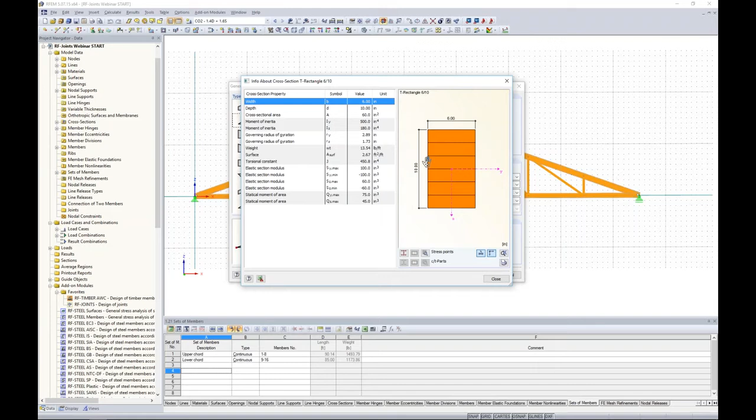For the diagonals and verticals, these are just more of post members, 5 inch by 5 inch, Douglas fir larch, so a softwood here. Again, the member properties can be viewed. Now, the program automatically sets the member type to beam for the upper and lower chords, and you'll notice that the diagonals are set to truss.

For any type of modeling software finite element, we typically have different member types. For our program, beam type is anything that would be a beam or column. Now a truss would be the same thing as a beam, but we've automatically applied the moment end releases to those members. So a truss makes perfect sense for all of our internal members within this truss that we don't want to transfer any moment to our upper and lower chords.

So leaving these settings as is for the member type, we press OK, then we'll get the generation of our timber structure here. Then I did add a pin support on my left-hand side and a simple roller support on my right-hand side. Now, the other thing that we need to take care of is that when I did generate the truss, a fully rigid connection was available at the top of the truss, also on the left and the right.

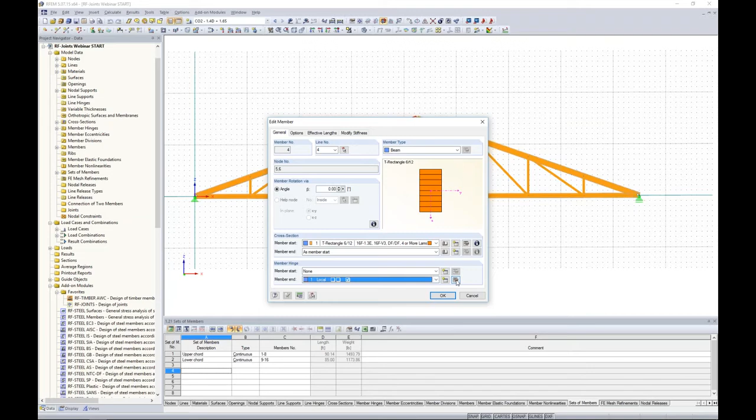So you'll notice that I've applied a simple pinned member end release for the top of my truss, just one of the members. You can do so by editing the member, double-clicking it. You'll notice that we have member hinge at the start and member hinge at the end. I just created a moment release, which you can see here in the two-dimensional direction about the local y-axis. Now I did so at the beginning of the member on my left-hand side and the end of my member on my right-hand side. So modeling is essentially complete for this simple timber truss.

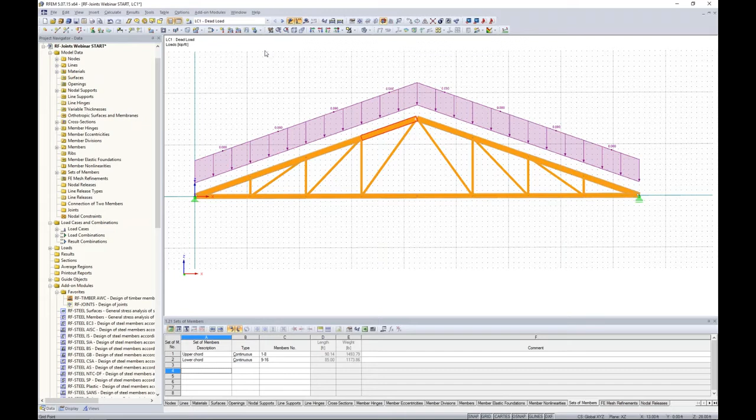I did also apply some loads, and I have two load cases. You'll notice in my drop-down box I have dead load and snow load. So my dead load, if I display it, is just a simple member load, 0.08 kips per foot. The snow load, on the other hand, is 0.12 kips per foot in the projected Z direction. So we're taking into account this member angle and how that load directly applies to these upper chords.

Now I also created a couple of load combinations just manually, and maybe if we enter in the load combinations dialog box we can see this. So we do have the options to automatically create these load combinations like I mentioned per ASCE 7 for example. But for the simplicity of today's example, I created two load combinations.

The first could be considered an ASD load combination where my load factors are 1.0 for dead load and snow load. My second load combination is maybe an LRFD load combination where I have applied the load factors of 1.4 and 1.6. You can see in this drop-down box we have quick access to them, or we can overwrite them with whatever load factor we would like.

So now you have the ability to toggle between the load cases and load combinations, and we can run our first analysis. I can go to calculate all, and we'll see within a split second the model will be solved. So we are still in RFEM. We haven't touched any of the add-on modules yet. So once we run this analysis, in our project navigator over here, we have the results tab available.

And we can, for example, view everything graphically such as global deformations. We can change the display factors here. What may be a little bit more interesting is to take a look at our member internal forces. Here you can see we have our axial forces. We have some pretty high tension forces on the bottom. We have high compression forces at the top, denoted by the negative magnitude sign here.

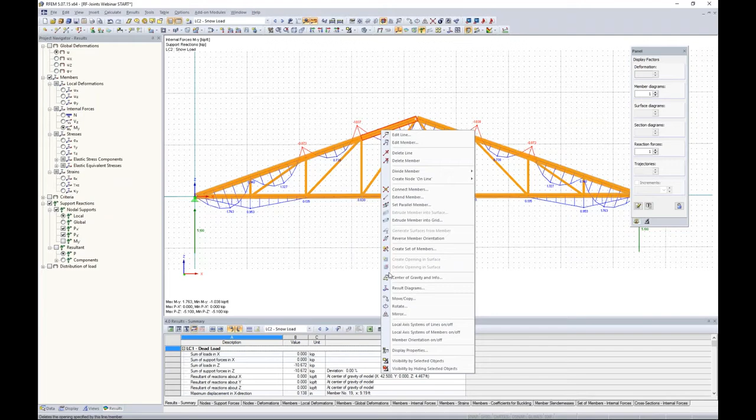Now, this is great graphically, but sometimes we want to see a little bit more information as it relates to the member. So we can always right-click on a specific member and choose Results Diagram.

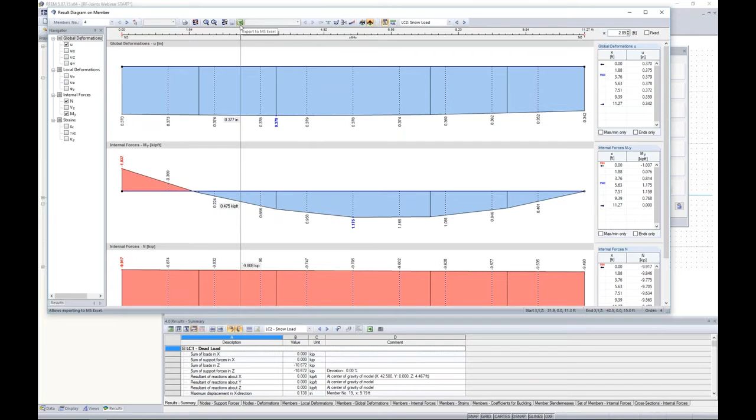Now you'll see the entire member here. We can turn on more graphs such as internal forces, deflections, and get a more realistic view of what's going on along the length of the member. You can print this off directly to our printout report. You can export directly to Excel for further sorting. So a lot of powerful capabilities in just viewing our analysis only.

So now that we have run a full analysis, that's great, but typically as design engineers, we want to move on to code checks. So this is where we are going to make the clear distinction that we're going to utilize an add-on module. In the data navigator over here, you will see the long list of add-on modules. We do work in the add-on module system because we really want to cater the software to your needs. Not everybody is going to be in the Chinese steel design, for example, so why should you pay for it? So we, again, are trying to cater towards your specific design needs.

We also have them organized a little bit better with this add-on modules drop down at the top here according to the different materials and applications, dynamic analysis, things like that. So for today, we will launch the RF-TIMBER AWC. Now, to begin with, you'll notice we have both ASD and LRFD, so that's nice. Some other software programs for timber design only give you ASD, for example, so you have complete control over which design method you would like to run. Today, we will choose the LRFD.

Now, the ultimate limit state design, you'll notice that my load combinations and cases were brought in from RFEM, so I don't need to redefine any of that. So ultimate limit state, we'll choose our LRFD load combination, and serviceability, we will choose our ASD load combination.

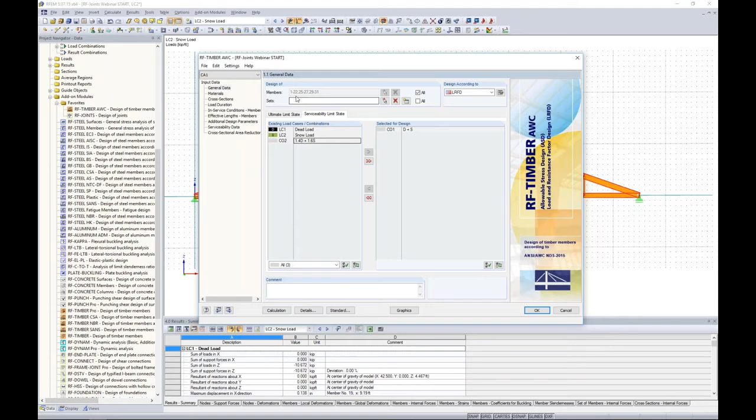Now, the next thing to go ahead and define are which members or sets of members would we like to design. So let me quickly explain that when we go back to this add-on module, if I zoom in here, the program automatically created a set of members with the truss generation for my bottom chord, and I also have a set of members for my upper chord. What I wanted to mention is if you do zoom in, you can see a faint dotted line around it. I know that's hard for you guys to see, but if you were in the software, you'd be able to hover over that and see it's a set of members.

A set of members will essentially be designed like a continuous beam. You know, we don't want to optimize one of these individual members different from its adjacent members. We want to get a code check for this entire bottom chord. So that's where the sets of members comes into play.

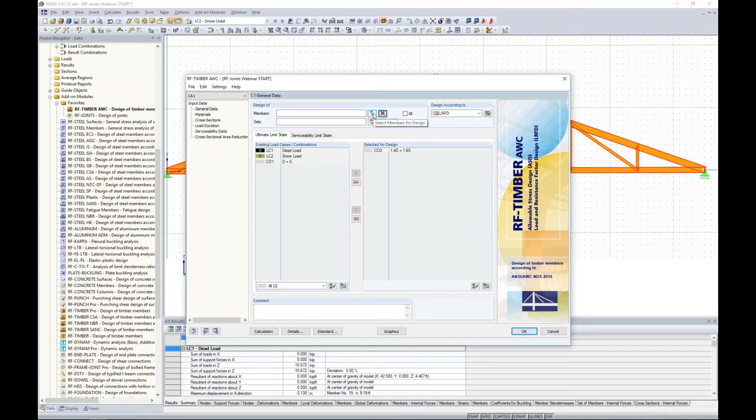Now the default is to select all members. I'm going to clear this, and for my member design, I'll scroll in here and I can just use my selection box, similar to what you would find in AutoCAD, for example, to select all of my internal diagonals and verticals for my member design. And for my sets of members, I simply choose graphically the upper chord and the lower chord, and we click OK. So now we have the distinction between members and sets of members for what we'll be doing for design purposes. Now all I need to do is to simply move down the list.

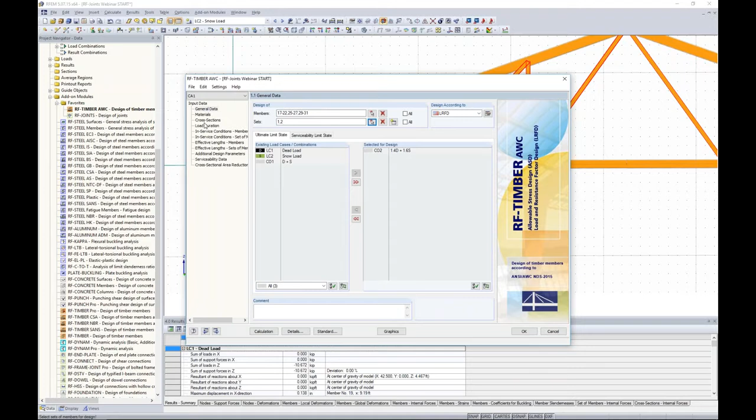Next we will go to materials. Again, everything is brought in from RFEM, so I don't have to redefine my materials, my geometry, my cross sections. All that we're doing in this add-on module is giving some further design information related directly to the NDS code.

Now you'll notice that we have two bright red materials here, and that's just because when I open up a new model, concrete and steel are defaults within the program. I can delete these back in RFEM if I wanted to, but all the program is telling me is that these are not applicable in the timber add-on module. That makes sense. But our two materials that we did define to our members back in RFEM are applicable. I can click them and view all of the material properties that will go into the design of this member.

Again, cross-sections, same concept. The member cross-sections are brought in from RFEM. I can view some of the cross-sectional properties here again if I'm interested in them. And we can move on to load duration.

Now, this is load duration factors. We assign dead load and snow load to the applicable loads that I applied in RFEM. The program is smart enough to know what load duration factors to apply to this. Now, we can always use our drop-down box to adjust these, but even more so, there is the standards button down at the bottom of the dialog box.

So the standards button will show you every single factor that is going into the design process within this add-on module. So for example, the load duration factors. What is nice is that you can adjust these if for some reason you don't fall between 10 years and 2 months, but somewhere in between, you can adjust them. That's completely up to you.

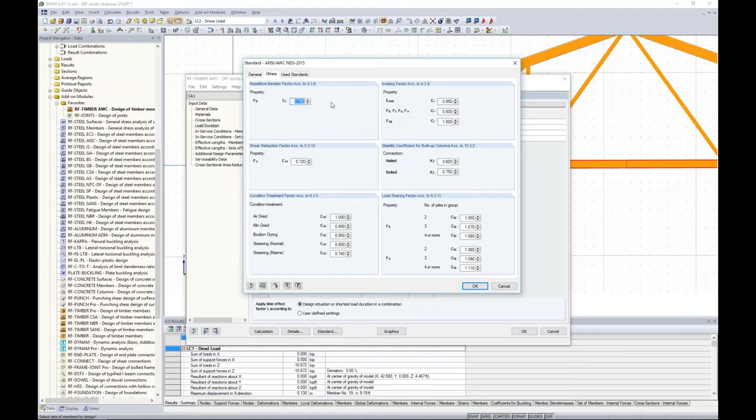Then you'll notice some of the other factors such as temperature factor, wet service factor. If we go to the others tab, repetitive member, shear reduction factors. Again, this is just all the information from the code. Under the used standards, we just list for you to know which standards are being utilized for the design, which you'll see at the end, we give you references to these standards as well.

So moving on down the list to in-service conditions. Again, this just comes from our standards button down here, moisture service conditions. Are the members dry or are they wet? Our temperature ranges, we can change these if we would like. Now you'll notice that we have 2 separate tables for members versus sets of members. This is just so we don't group everything together. I think it's laid out a little bit nicer when we separate members versus sets of members, and then we can control those factors individually.

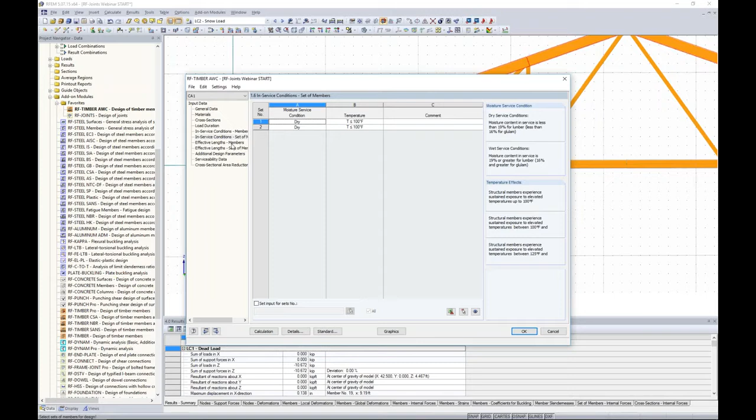Effective lengths for members. So this is stability checks. You'll notice that we have buckling about the weak axis, buckling about the strong axis, and lateral torsional buckling. So I'm going to assume for all of my internal diagonals and verticals here that buckling about the strong and weak axis as well as lateral torsional buckling is a concern. So I'm just going to leave everything as is here, and I'm going to let the program determine if this is okay based on my design.

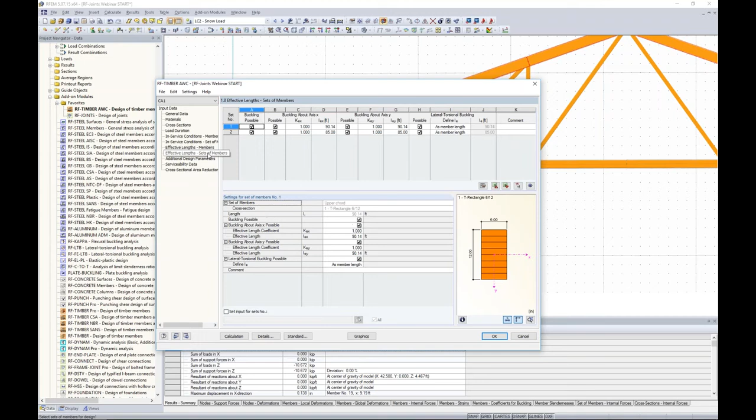Now the effective lengths here default to the full member length, but you can easily control these lengths by typing it in or graphically using the measuring tool here, so you have complete control over this. Now again, our sets of members is on a separate table. And for my upper and lower chord, I'm going to assume that I have complete lateral bracing along the length of the member. So therefore, weak axis buckling about the local z-axis, which I have my axes shown down here, is not a concern to me.

And it would be the same thing for my lateral torsional buckling. So this is not a concern based on my connections or my lateral bracings. All I have to do is just to simply uncheck the possible. Buckling about the y-axis or the strong axis, I am still concerned with this, but right now it is set to the full member length, the full set of member length. So it's pretty large, 90 feet and 85 feet.

Maybe for uplift wind purposes, I have much smaller unbraced lengths here. For example, the upper might be 3 feet and then the lower might be 3.5 feet. So as a design engineer, you always want to pay careful attention to your unbraced lengths because this significantly affects our stability design.

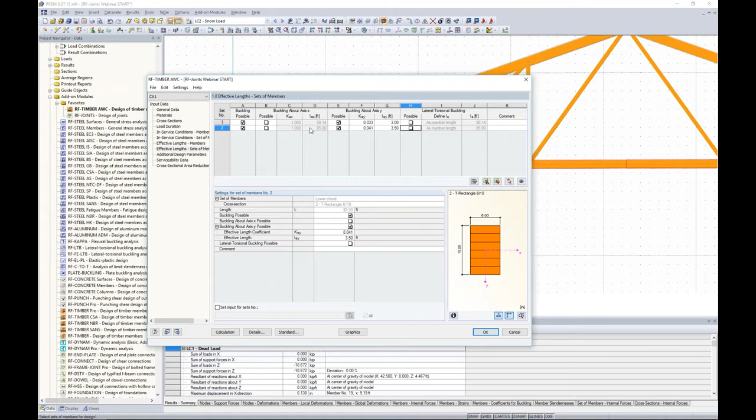Okay, so moving on to additional design parameters here. This is just shear reduction factors, edge bonded. This refers to our glulam members for our upper and lower chord members. We have the code references here. Again, the standards button will tell you what those factors are. If we scroll down a little bit further, here's our incising factors and repetitive factors for our post or our brace members within the truss.

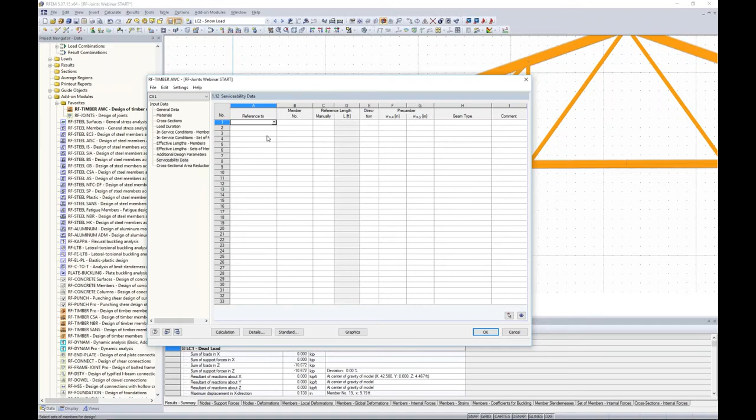And we can move on down to the serviceability data. Here is just deflection checks. We can check every single member if we'd like to in our model, or maybe we're only concerned with checking a couple of members. So for this example, I will graphically choose perhaps one of my diagonals here that I want to check my deflections.

I click OK. The manual reference length is set to the full length of the member. That's fine. Do I have a pre-camber? If so, I could put this in here. And lastly, I need to specify if this is a beam or cantilever.

Now I can do the same thing with a set of members. So maybe I'm interested in my bottom chord deflection. Well, all I need to do is to graphically select my bottom chord here. The full reference length is set at 85 feet. And again, we just use the beam type beam.

Now the question is, what deflection ratios am I comparing this to? Where can I control that? Well, under the Details tab under Serviceability, here's my limiting deflection ratio. You can see the default is set at L/360. Now for cantilevers, it will always use 1/2 of this ratio that you set in here.

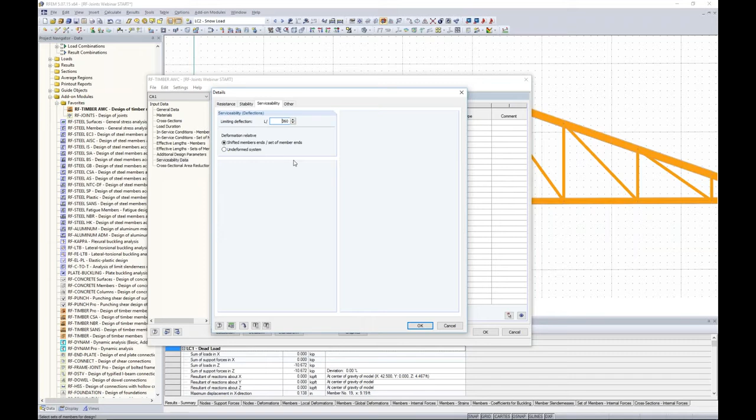Then you need to specify whether the deformation is relative to the shifted member ends or the undeformed system. This may be better known as relative versus absolute deformation. So this is where we can control this limiting deflection ratio and change that if we'd like to.

And lastly, we can move on to the cross-sectional area reduction. This is if we have a notch within our member. Maybe the member connection at the ends, or maybe the member is sitting on top of a wall or another member, and we have to take this cross-sectional notch out of the member. We can easily account for this by just selecting the member graphically again, and then giving where the notch location is, whether that's the start, the end, or within the inner span here.

Then we just give the notch the geometry, and the program will automatically account for that cross-sectional area reduction. So it's smart enough to only compare those internal forces at this notch location for design purposes, meaning we don't have to reduce the entire cross-section of our member and get an over-conservative design. So just a nice little additional feature if you do have this scenario. For our case, we won't do that today.

Now, before running the calculation, I want to quickly run through the rest of the details tabs. What is exactly going on behind the scenes here with some of these other options? So the first one under resistance is consideration of connections, the reduction of limit tension stresses. So if I check this, what this means is that occasionally we have the weakening of a cross-section at a connection. So what I can do is check this checkbox, and all I need to do is to select a node, and here I give the connection length. Maybe that's 6 inches, maybe that's 1 foot, and I can actually reduce the stress ratio inside that connection.

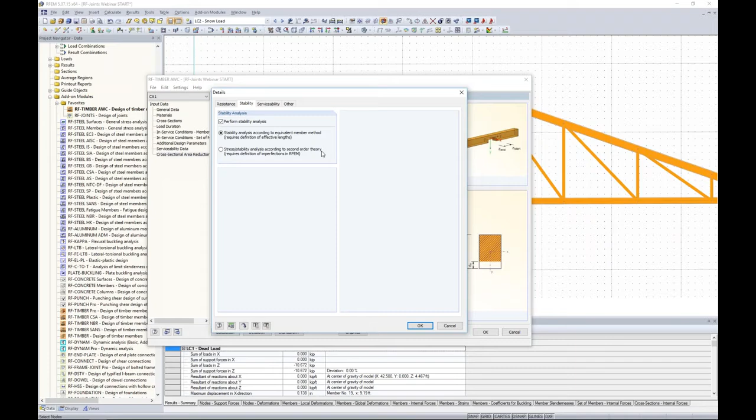So with that said, back in RFEM, if I open up my load combinations, you'll notice that under calculation parameters, it is always default in the program to run a second order analysis for our load combinations. This will take into account P big delta and P little delta. So perhaps you have an existing structure, or you're just really close on your design checks and you don't want to increase your member sizes. Technically, you can go back into RFEM, change this to a geometrically linear analysis, and then you can take into account these second order effects within the add-on module only, so the design part of it.

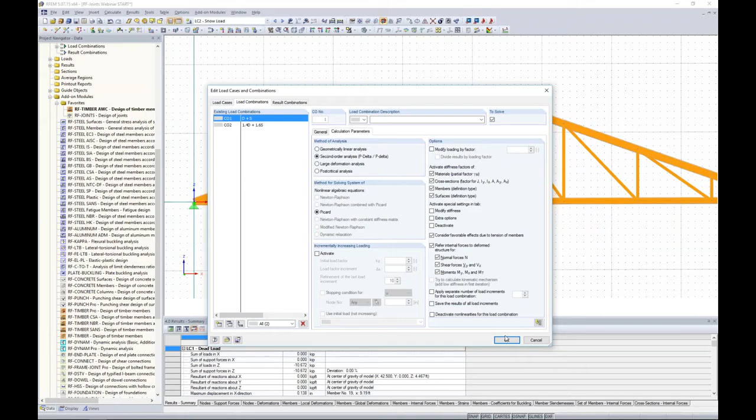Now, it is typical for most engineers just to leave on P-delta analysis in RFEM. Therefore, your internal forces are a little bit higher, but it's just a more conservative route to take. Now, the other option within here is stress stability analysis according to second order theory. It requires definition of imperfections in RFEM.

If I were to check this, what I'm doing is I'm telling the program under the effective lengths that the buckling for strong and weak axis, I'll take that into account with the analysis. Maybe that's with stiffness reductions or with those notional loads, imperfections, things like that. With lateral torsional buckling, there is no way to take that into account with the analysis side, so I'd like to still do a check with that within the design side. Regardless, today we will stick with the default of checking, again, our strong and weak axis buckling.

Serviceability, we've already been through, and on the other tab, cross-section optimization. So design ratios are maybe more around 0.8, possibly 0.9. It's typically not 1.0. So for optimization for your members, which I'll show you in just a second, you can change this to 0.8, for example, for design purposes.

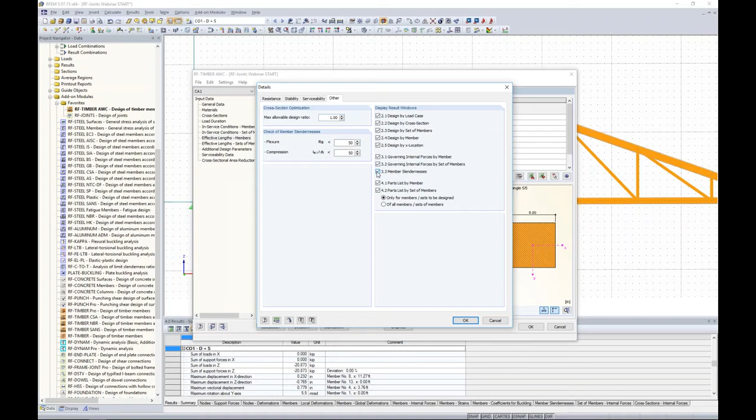Check of member slenderness. If member slenderness is a concern, here are the ratios that we have set according to the code for flexure members, compression members. You will need to activate 3.3 member slenderness right here for our result windows if you are wanting to check for member slenderness. So that's pretty much the concept for all of the input data, and now we're ready to run our first calculation. You can see that solves within a quick second. All it's doing is bringing the internal forces into this add-on module from RFEM, and we apply the NDS code for our design.

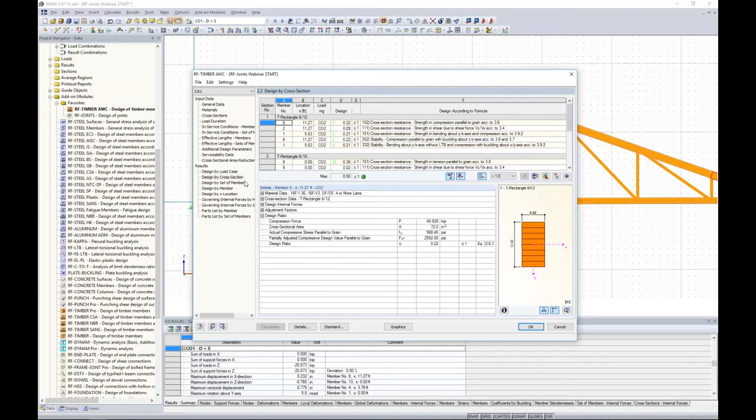Now we have our results tables available, and we can view the design by load case. We can view design by cross-section. We have 3 different cross-sections here. Maybe we want to view design by the sets of members or by each individual member. Now, what's also great is that as I'm clicking through these tables, you'll notice that it is synced to the graphics view in RFEM. Even the X location of my controlling internal forces line up with my tables here.

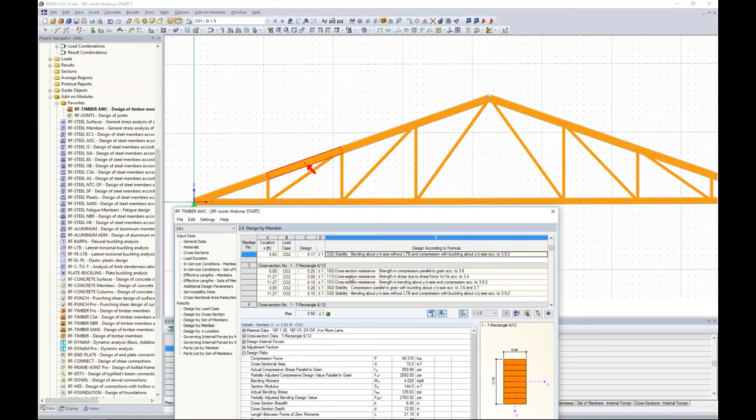And something else that I really pride ourselves on, because I know this isn't available in a lot of other software, is that we give you the code check for everything within the NDS. So we're not just giving you the controlling code check for each member, but you can actually scroll through and view the different checks individually. Even more so, we give you all of the variables that go into that code check, as well as the equation references. So if you have the NDS code right in front of you, here's the equation for your C sub P factor. You can quickly flip to it and understand where those numbers are coming from. So again, a very powerful feature.

Now you can always export directly to Excel to do some further sorting, and as you can see, we have this nice big green smiley face because our design check is only at 0.5. So looks like we're doing quite well with our design. We can also view some of the governing internal forces by member if you are interested in that.

And lastly, we have a parts list by member or a material takeoff. So as far as optimization, just to quickly touch on that, if we go back to our cross sections table here, you'll notice that the max design ratio for each cross-section is given. I think we can see that our top chord is pretty low, 0.22. So maybe this isn't an ideal cross-section to have, and rather we'd like to optimize to something more like 0.8.

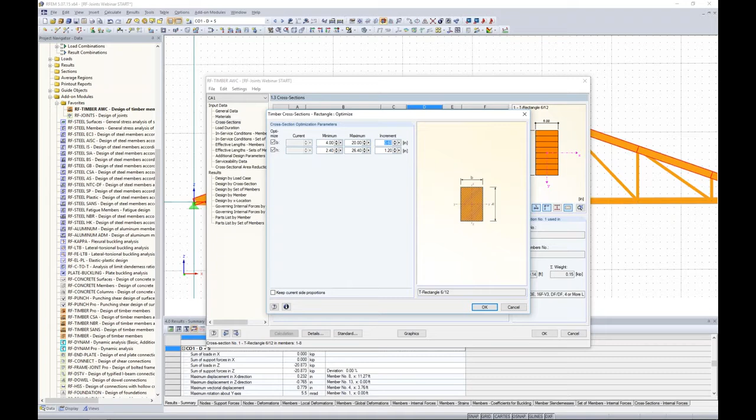Well, again, we control that 0.8 under our details setting, and here is where we can choose the option to optimize. When I click yes, then all I need to do is give the program some dimension ranges for both my depth and my height, like maybe 4 inches to 20 inches with an increment of 0.5 inches. So then we can just rerun the calculation, the program will optimize, and we can continue on with using these new section sizes. For connection purposes, I'm not going to do this, so we'll just stick with the design that we're given.

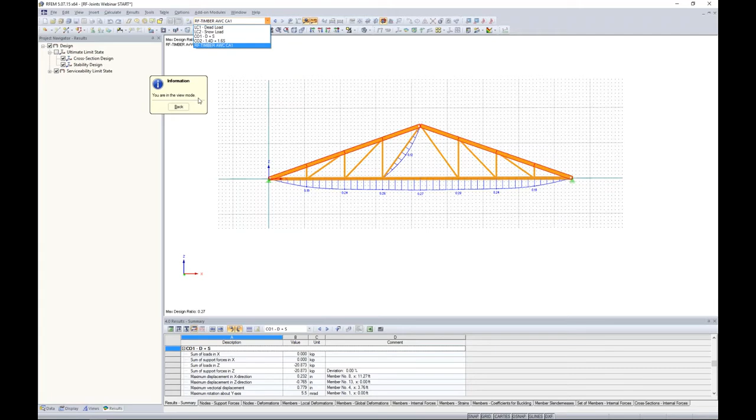Lastly, we can view everything graphically. We're back in RFEM, but we're still technically in the add-on module, which you can see from the drop-down box and this little dialog box here. We're still in RF-TIMBER AWC. So I can view my ultimate limit state designs, which you can see graphically here, and I can turn on my panel. Well below 1.0, we can print these off.

Serviceability we can take a look at. Remember, we only check serviceability deflections for our set of members down at the bottom and one single member here. So graphically, we can view everything rather than just the tables. So that basically sums up the member design. And the next thing that we want to move on to is connection design.

So I can go back to my data tab, and I have my other add-on module here, RF-JOINTS, and I will launch that. So again, just another simple dialog box, which is the add-on module, taking in all the internal forces. We just need to further specify some information. You'll notice that we do have steel and timber. Unfortunately, at the moment, steel is only per Eurocode design, but at some point in the future, we do plan to add AISC as well as CSA steel connections.

But what is exciting is that we did add the NDS 2015 for our timber connections. You can see we have both ASD and LRFD available. Maybe to just continue on from our member design, we will stick with LRFD design. We have steel to timber connections. Now the joint categories, we either have general dowels we can choose from, or you can also see that we have bolts. For today, we will be going with general dowels.

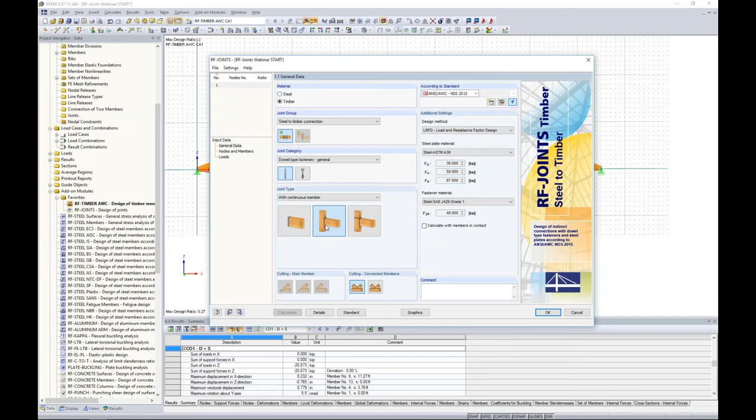Now, 3 different joint types. We have the first joint type, which is main member only. Maybe you have the cantilever of a beam from a wall, for example. Well, that would be applicable for this type of connection. The second connection type would be with a continuous member and a second member framing in. Well, that might be something more like this connection here where we have our continuous upper chord and we have a vertical framing into that continuous member.

And lastly, we have without continuous member. So at this particular connection joint, we don't have any continuous members that we're wanting to define. So this is what we'll be continuing on with today. As far as the cutting of the main member and connected members, I'm going to pause on this and we'll get back to this because it'll make more sense once we're visually looking at our connection.

The checkbox calculate with members in contact. If we were to turn this on, this essentially just tells us that we're considering 2 members are in contact. And if we have extremely high pressures from one member down onto the other member, the program will actually flag us and tell us, well, this is something that you may want to look into further.

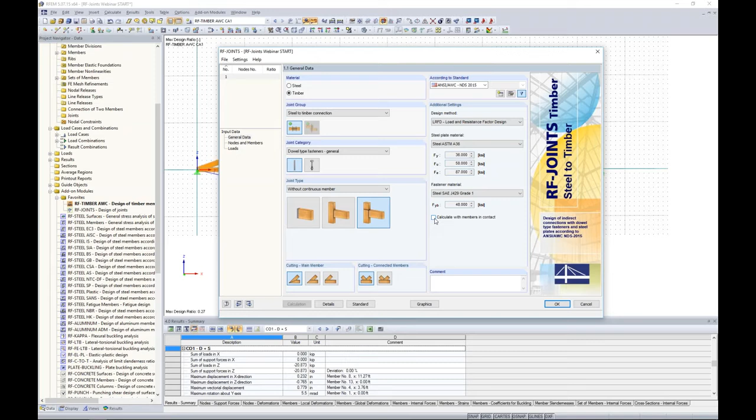So we don't give you design for these members in contact, but it's just an additional check to notify you if we do have some extremely high pressures from one member to another. So again, we just simply work down our list here. We'll move on to nodes and members.

Now in our little graphics view, you will see our truss. This is brought in from RFEM, and nothing's highlighted right now. Everything's grayed out because we haven't selected any nodes in particular. Now this is import from the structural model, or we can set manually here.

Now if we choose set manually, what this allows us to do is to really define any type of connection that we want, including the materials, the cross sections. We can define different angles, so we don't have to use what we had modeled here in RFEM. For today, it definitely makes more sense to import in what we've already modeled in RFEM, so we can do a further connection design here.

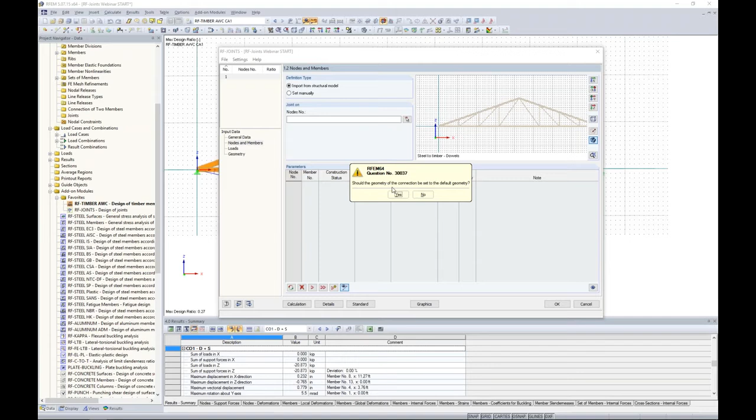The first thing I want to do is to choose my nodes that I'd like to consider for my first connection. Well, I'm going to choose node number 1 on my left and node number 2 on my right. These will be identical connection designs, so we'll use those. Should the geometry of the connections be set to the default geometry? Yes, I want to bring in what RFEM already has modeled.

Now you can see I can zoom in here and my members are highlighted at that particular connection. So at node number 1, the program automatically assigned the connected member to member number 1. And if I use my drop-down, I have connected member, main member, inactive. Now member number 9 at the bottom is set to the main member. My materials and cross-sections were automatically brought in from RFEM. Even my angles were automatically determined, so I don't have to worry about redefining that information.

Quickly jumping to geometry. Now, our picture of our connection will be populated here, and I think we're all in agreement that this is not the ideal connection. Nobody would cut these two members right down the middle and create a connection by any means looking like this. So how do we change this? Well, back on the General Data tab, this is where the cutting of the main member and connected members are affected. So I'm going to change this to the second option, which you can see here graphically.

Now jumping back to my geometry tab, well, this is looking a little bit better. But ideally, all of these internal forces from our upper chord are going to be bearing down on our bottom chord. Timber is not very strong when we're considering these internal forces bearing down here. So I want to flip-flop these, so to speak.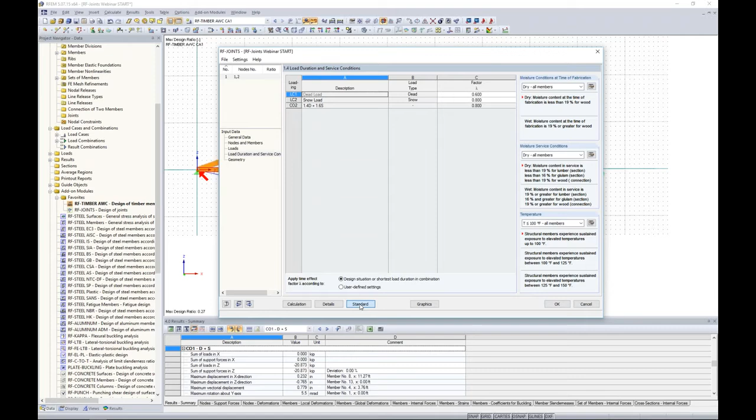Load duration and service conditions, this should look pretty familiar to what we just saw in our AWC module, our member design module. Things like load duration factors, moisture conditions, moisture service conditions, temperature. Again, if we pop open this standard, well, here is where we can see all of the different factors that are applied for the connection design. We can scroll through these. Everything's just coming directly from the NDS code.

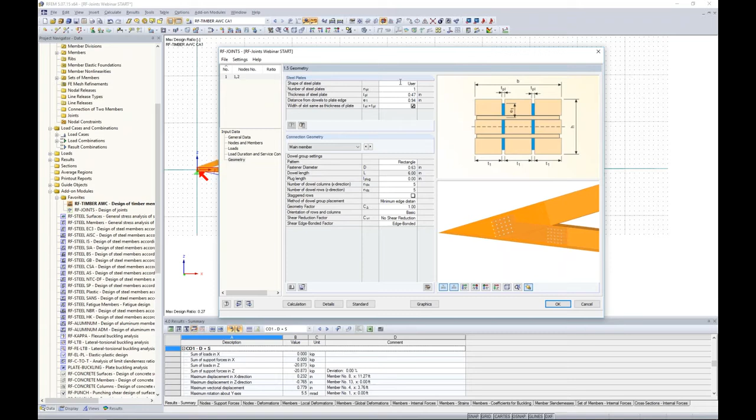So lastly, moving on to geometry. So this is probably the most important because here is where we are going to define our dowel layout and our steel plate layout. It's pretty self-explanatory. All I need to do, again, is work from top to bottom, filling out each variable here. Now, the shape of the steel plate, the first option is user-defined, which you can see that this is basic, just rectangular sections at my upper chord and my lower chord.

The second option is convex hull. The program will do the best attempt it can to simply connect these two rectangles with a straight line. So maybe this is something a little bit more similar to what we'd see actually fabricated. So that's an option if you'd like. And the third option is rectangle. You can see this is not ideal for our connection today, but this could be ideal for another scenario. We'll just stick with this user-defined connection for now.

Now, the number of steel plates can vary anywhere between 1 and 5 steel plates. For the first run, we'll stick with 1 steel plate. We do need to give the thickness of the plate. We'll set that to 0.5 inches. Now the distance from the dowels to the plate edge, E1, we do our best to give you all of these variables graphically as well, so you can understand exactly what information you're entering in here. So for that edge distance, we will set that at 1.2.

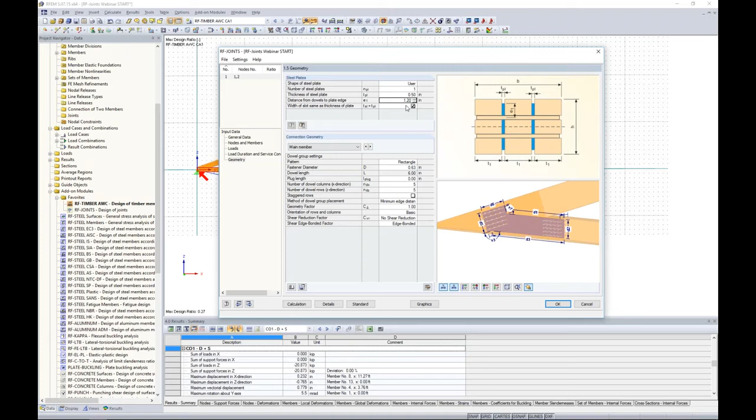Now, is the width of the slot the same as the thickness of the plate? Well, if this was not, then I could specify the slot thickness different from the thickness of the plate if I would like to. Moving on to the connection geometry, you can see that we have the main member here, or we have connected members. So we first want to start with our main member. The pattern will always be rectangular.

The fastener diameter, which we can change our viewport here and zoom in to see exactly what we're setting in terms of our dowel layout, we will set to 0.5 inches. Now the dowel length is automatically calculated simply based on the thickness of my glulam member. So this is set at 6 inches for the thickness of the member.

Now perhaps I would like to not see the dowel holes, for example, and I want to put a plug on either side of these. Well, here's where you can set that plug length of maybe 0.5 inches. And you'll notice that the dowel length automatically takes that into consideration and reduces to 5 inches. For today, we will leave the plug length as 0.

Now, the number of dowel columns, we can set this to 8. The number of dowel rows, we will set this to 4. The little picture automatically updates here. Staggered rows. This is just a more economical design. We still have 8 columns and 4 rows, but because our bolts are staggered, we can get away with a few less dowels or bolts.

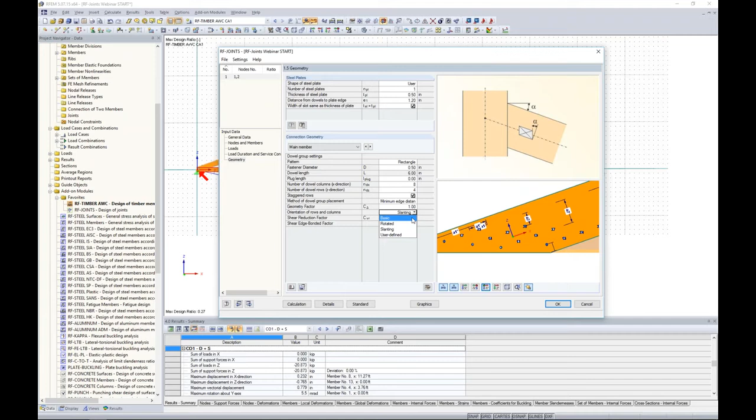The orientation of rows and columns, the default is set to basic. You can change this to rotated, where the program will automatically rotate that 90 degrees. Maybe we want it slanting, which is an interesting configuration where it will fit them all at the bottom of the member here. Or the fourth option is user defined, where we can define an angle and a rotation here. We'll just stick with the basic layout for this example.

Shear reduction factors, shear edge bonded factors, again relate to our glulam members. So we have this set for our main member. Now we'd like to use our drop-down box to move on to the connected member. So for the connected member, we need to make some changes here again. The fastener diameter, we'll set this at 0.5 inches. The number of dowel columns, we will set this to 10. And the number of dowel rows, we'll set this to 2. I would like to utilize staggered rows if possible, and we'll leave this at the minimum edge distance.

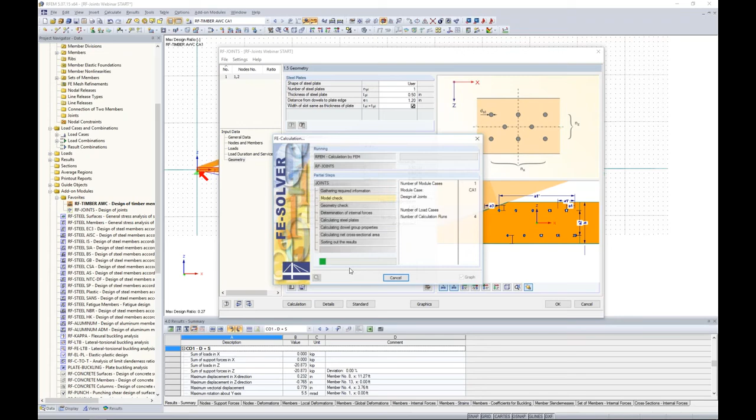So now we're ready to essentially run the analysis for our first connection. All we need to do is run calculation. Again, the program quickly cycles through that, and we come up with our connection design. So what's initially shown here is our main member and our connected member. I think what's probably standing out to us is this bright red number of 4.61. That's certainly not okay. If we're looking at a few of these other checks, again, complete code transparency, so to speak, for our connection. We give you the code check for everything.

If we're cycling down through these, and we will get to dowel group, load carrying capacity of a single dowel. Well, we're extremely overstressed for this. Maybe I want to scroll down through, see where some of my numbers are coming from. All of the factors are listed. Here are all of my equations directly from the NDS code. And lastly, my extremely high ratio of 4.61.

Scrolling down to my connected member, I obviously have a huge problem here as well. My load carrying capacity of a single dowel is exceeded. So before checking out the rest of the results, let's go back to our geometry and make some changes here. Maybe the first change I'd like to make is I'm going to add an extra steel plate. It's asking me, do I want to delete my results?

Yes, this is fine. Now I can kind of rotate this view around, and you can see that these steel plates are shown here graphically quite nice. It's a nice rendered view where we can actually see what's going on. Now, there are a few other settings that came up with adding 2 steel plates. For example, we can set these as side plates if we wanted. So rather than be embedded within the glulam members, you can see now they are side plates.

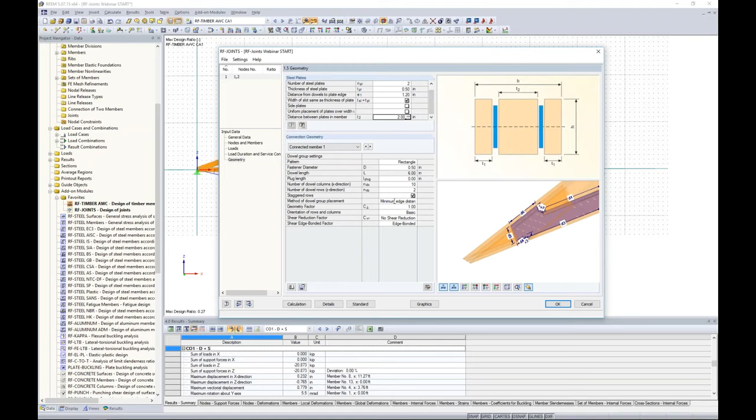Looking at our connected member number 1, well, I'm going to leave most of this as is except for the method of dowel group placement. Sorry, I want to switch this over to the main member first of all. So we'll scroll in here to our main member. Now, instead of the minimum edge distance, I'm going to choose a user-defined setting here. So the distance between dowel columns, which you can see everything is shown graphically here, again, for what numbers I'm entering for my variables. Perhaps the distance between the dowel columns, we'll set this at 5 inches.

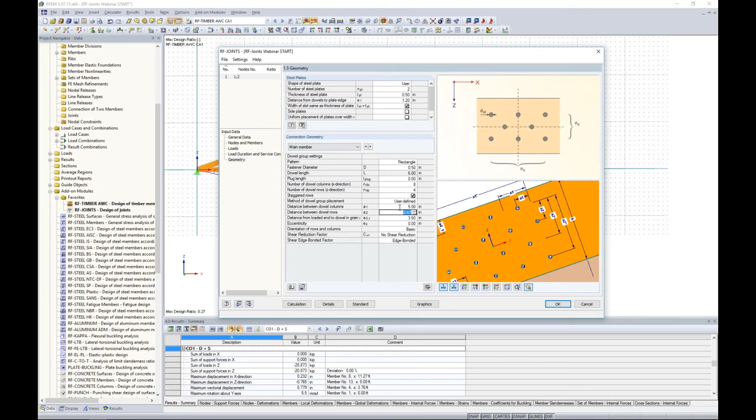The distance between the rows, we can change this to 2.5 inches. And the distance from the loaded end to the dowel, A3, which you can see here, we will set this to 6 inches. Eccentricity, if you want to move this connection up or down, you can do so as well with this eccentricity setting. Now, everything else we'll leave the same for this main member.

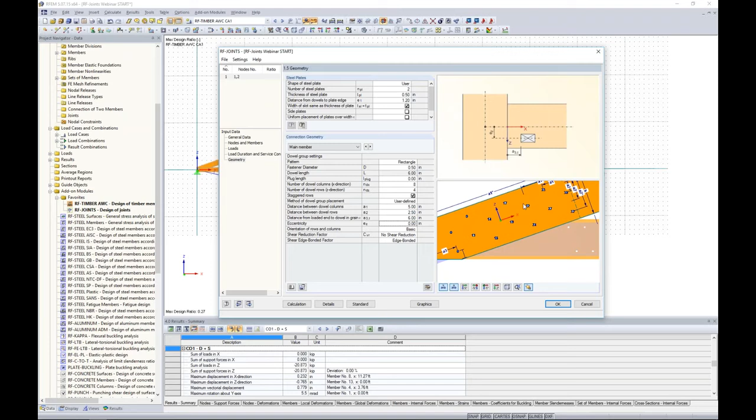Connected member number 1, remember we're extremely overstressed here. There were pretty high tension forces on this lower chord. So maybe I want to space out these dowels a little bit more to get a little bit more capacity down here at the bottom. Now we did add a second steel plate, so that will help us as well. So instead of the minimum edge distance, I'm going to use these user-defined settings as well.

So my distance A1 between my dowel columns, I'll set this now to 5.0. And the distance between rows will be 2.5, and the distance to the edge, A3, will now be 6.0 as well. No eccentricities. So now that I've made these slight adjustments, we can quickly rerun the calculation with this new geometry to take a look at our results. It looks like we're still slightly overstressed, 1.23. Well, at least we're doing a lot better than the 4 point whatever it was code check from before.

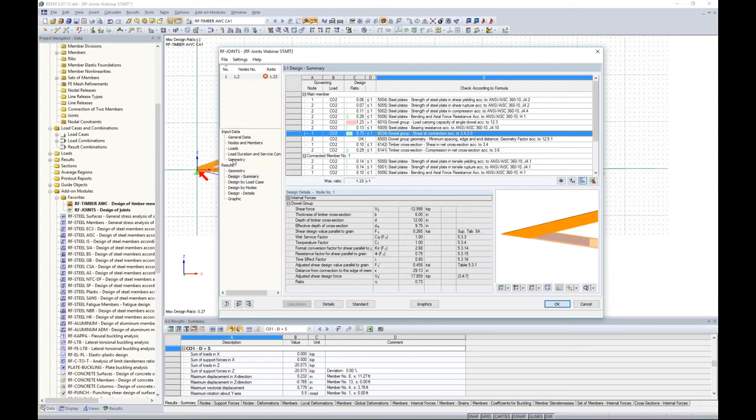So we're almost there. If I scroll down to my connected member, I'm now at 0.8 as my controlling code check here for my load carrying capacity. That's great for design purposes. So I think we're done with that connected member. But we still want to go back and address the main member quickly. Well, maybe I don't want to add any additional dowel rows or columns. I'm content with the size of my dowels.

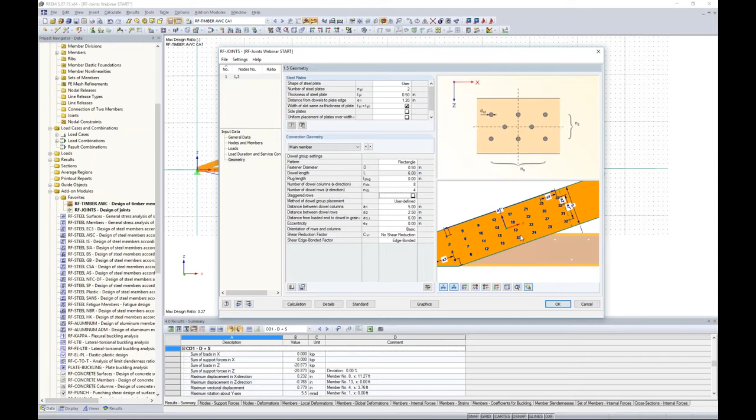So what I can do is just simply uncheck my staggered. Do I want to delete my results? Yes, that's fine. So now instead of staggered rows, you'll see that I have a true 4 columns and 4 rows. And so we have a few additional dowels added to this connection. We'll run the calculation again. And I think that we'll see now our controlling code check is 0.82. So that is good for design purposes.

So now taking a look at some of the other design tables that we have, designed by load case here. We only have one load combination we're solving for, designed by the 2 nodes, node 1 or node 2. Maybe the most user-friendly table would be this design details.

Here you can see that the ratio checks are set in descending order from the most controlling to the least controlling, but we also have the checks for minimum edge distances and dowel spacings. And again, everything is as transparent as possible with the code equations and references. Even the internal forces that we're designing for at that particular location are listed.

Our geometry here is just the geometry of the plates. You know, most of this was in user input, but things like the slip modulus for the fasteners, given the slip modulus for the connections, things like that.

Now, our last graphic here is pretty powerful as well. Obviously, we're not a program that's going to give you shop drawings or fabrication drawings for these steel plates, but what we can do is provide you a quick link to create a DXF file for this connection. So you might want to be doing additional drawings in AutoCAD, for example. Well, at the click of a button, you can create that DXF file if you would like to. So again, a pretty powerful feature here for our connection layout.

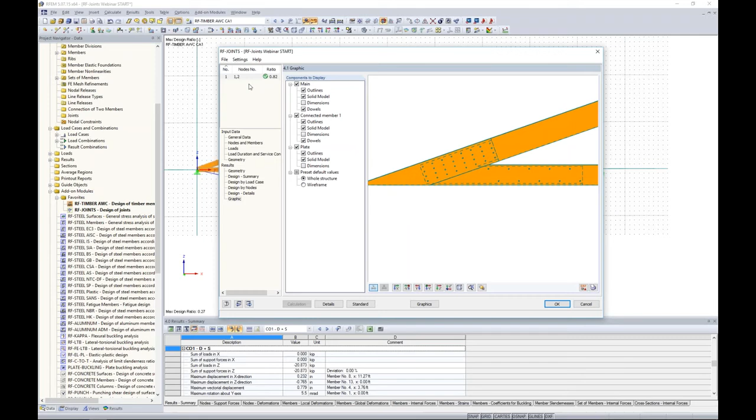So that sums up the first connection design, and real quickly we can go to graphics, and the program will automatically bring that connection back into RFEM for the graphic view. We can even rotate our member around and see the dowels and the steel plates in there. So in terms of actual rendering, everything is shown there.

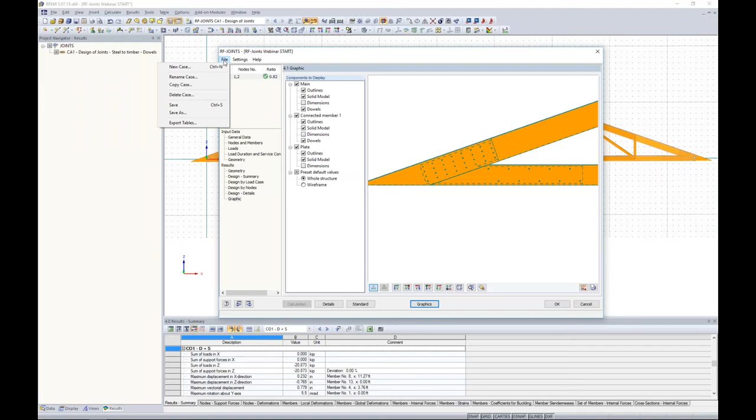Going back to the add-on module, I'm going to do a second connection design pretty quick. So we'll just create a new case here. You can rename it if you'd like. And again, just jumping through some of this user input entry that we've already been through, we'll create without a continuous member. We are doing LRFD design, and everything else we can keep as is.

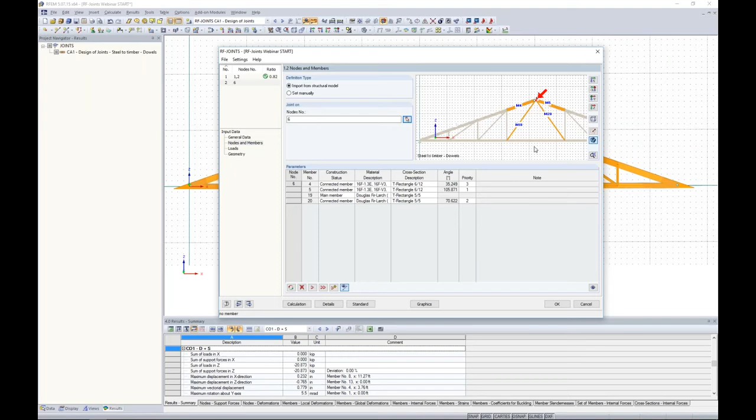The nodes and members for this connection, I'm going to choose the top of my truss. And I click OK. Should the geometry be brought in from RFEM? Yes. Now you can see that we have 4 members for this connection design. The program automatically assigned the connected members and the main member to the individual members that it brought in from RFEM. So how do we think this connection will look with how the program assigned it?

For this, we jump back to our geometry tab and we take a look at our connection, and I think we can all agree that this is a pretty big mess. This is certainly not what would ever be created by the contractor, for example. So we can adjust this back under our nodes and members, and the main member right now is set to this brace. Instead, I'm going to set the main member to my upper chord. Now my brace, I'm going to change this to connected member, and the program has automatically rearranged all of this, so we'll jump back to our geometry, and this connection looks much better.

Now, one quick note about this, when you have multiple members, you'll notice that we now have priorities. So it looks like the program automatically assigned the correct priorities for now, but let's say the other upper chord here is assigned to priority number 3. Well, again, jumping back to my geometry tab, we have a mess again.

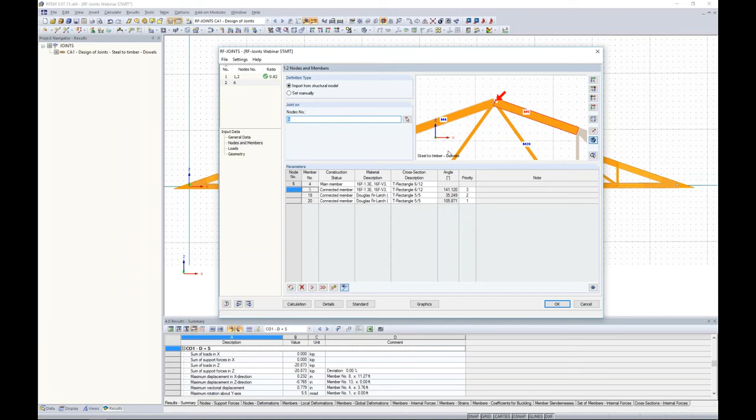So if you're not seeing what you like, you can just make some further adjustments rather than what the program automatically set these members to, whether that's in the nodes and members or under the cutting of the main member and connected members. So eventually you'll get the connection that you would like. It just may require some adjustments here. So for now, we'll change this back to priority 1, and we should be good to go.

As far as loads, we're choosing our LRFD load combination, the load duration and service conditions. We're not changing anything here. We'll leave this all to default.

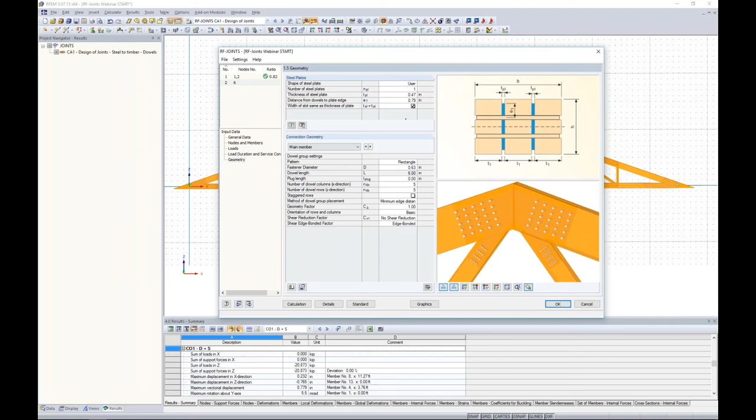So real quickly, since we've been through most of this, we will just fly through some of the user input for our connection data. I'm going to automatically assume we're going to need 2 steel plates here. The thickness of the steel plate will be 0.5 inches. The distance from the dowels to the plate edge will be 1.2. This dimension here in the middle, I'm going to again set this to 2 inches.

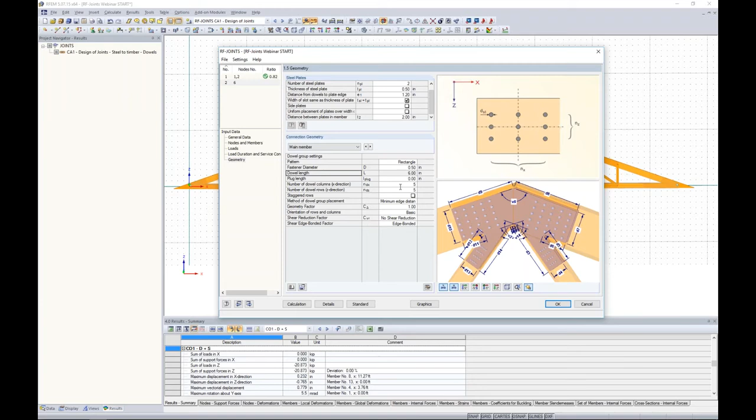So this coincides with my connection at the bottom of the truss too. So my main member here is the first member I'd like to create. The fastener diameter, 0.5 inches. The number of dowel columns, I'm going to set this as 8 columns, and we will set this as 3 rows. I will utilize a staggered effect here, which we can change around our dimensions to view this a little bit better. And I'm just going to go with the minimum edge distance.

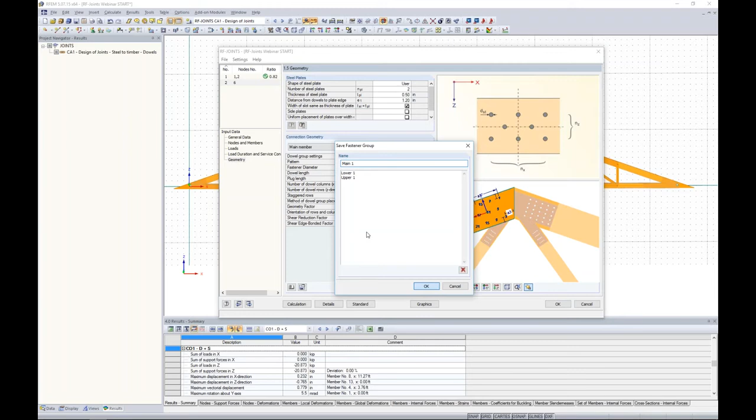So now that I've defined this main member on my left, my upper chord, I probably want to do some same setups for my upper chord on the right. So how do I quickly do this? Well, this is where we allow you to actually save the fastener group to the library. So here is where I can give it a name such as main 1, for example. I click OK. Now I use my drop down to drop to connected member number 1. All I have to do is to open up my fastener library here. I can click on main 1, I click OK, and everything is updated automatically according to what I just saved.

Now what's nice about this is that this fastener library isn't just for this model that we're in right now, but you can save fastener connection layouts between different RFEM models. So a little bit more efficient than manually going in and having to redefine this, especially if you're doing a lot of structures that have similar layouts. So that's a nice feature.

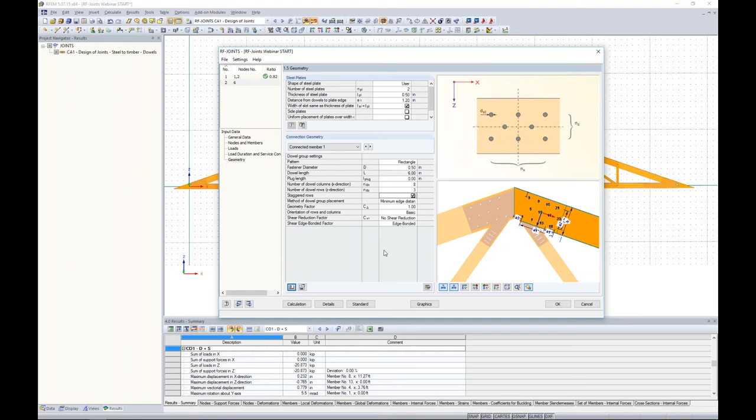Now dropping down quickly to the connected member, you can see this is a pretty slim member here. So we want to define our settings accordingly to 0.5 for the fastener diameter. The number of dowel columns, for this one we will set this equal to 6, but I only want 1 row. Now the staggered effect you can see really doesn't matter whether I have this checked on or off. The minimum edge distance, we'll leave this the same.

You will see that now we have the option for member eccentricity in the X and Z direction. So if I physically want to move this brace member to the left, to the right, up, down, I can change that here by just simply adding in that distance. Now keep this in mind because I'll show you in a minute how to export these eccentricities back into RFEM. For today, I'm not going to put any eccentricities in there, but just know that that's an option if you don't quite see the layout that you would like.

What's also impressive is that the program automatically knows that this is not a glulam member simply based on the material settings alone. So now we have things like the incising factor, repetitive factor, size factors for this simple post or brace member that are applicable. So again, you don't have to manually apply these factors, but the program knows they automatically have to be assigned according to the NDS code. Again, we'll just leave all of these as default according to our standards button down here.

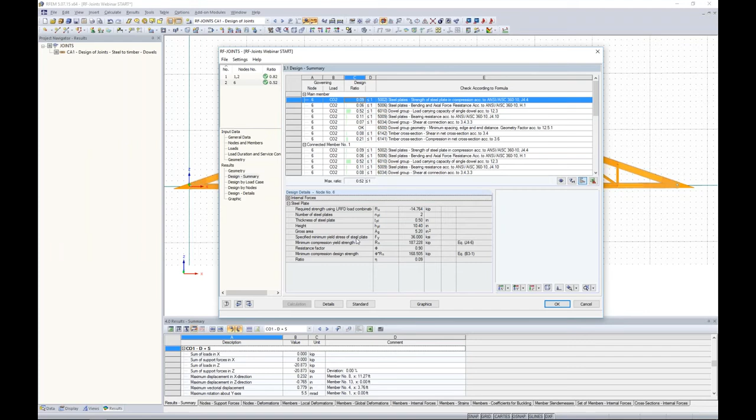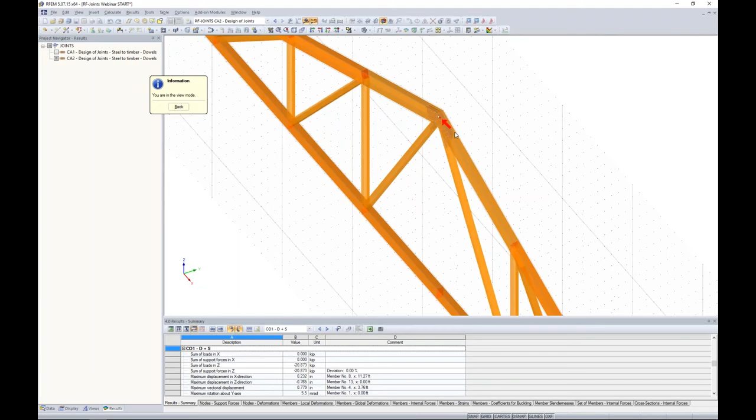Now we're ready to run a calculation. So again, it solves rather quickly. You can see that this brace connection went over a little bit better than the last one. We have a controlling code check of 0.52 here. So everything looks great in terms of that. Again, we can view everything graphically for this connection here. Under the drop-down box, you'll notice that we have our first load case for our joint and our second load case. So right now we're in the second load case viewing this connection. Again, I can rotate my settings here to see these steel plates embedded within my glulam members.

So that really is connection design, but the last thing I want to show you is the interaction of RF-JOINTS with RFEM. So what do I mean by that? Well, under the details, we have the option to, first of all, generate the member eccentricity. So remember with the braces, I told you you could move that in the global X or Z direction. Well, with this option checked here, the program can automatically export little rigid links to move that brace back in RFEM, whichever way you specified in RF-JOINTS.

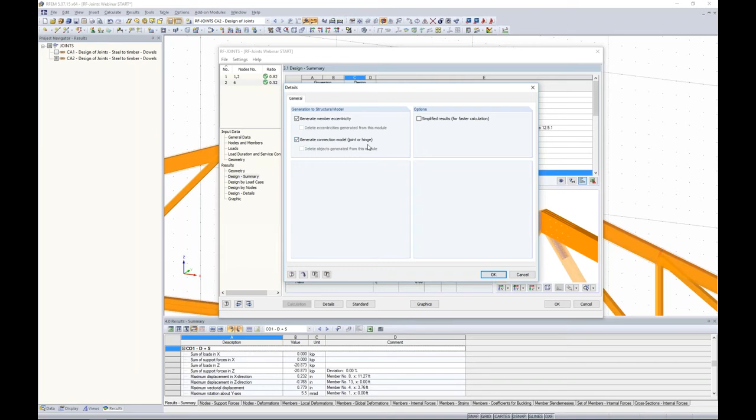Now, I'm not utilizing that today, but what I am going to utilize is the generate connection model of a joint or a hinge. Now, before I do this, there are some prerequisites, and if you don't do this, you will get some simple warnings within the program. So if you do forget this part, the program will remind you.

But the first thing that I want to do is I'm going to change this back to RFEM just for the simplicity. So I'm no longer in the add-on module, and I'm going to select all of my members here. I'm going to right click, select member and edit. So remember that right now we have some truss members and we have some beam members. Well, in order to export out my RF-JOINTS settings, all of my members need to be beams. That's just for the simplicity of the program. So that's fine. I'm going to set all of these to beams.

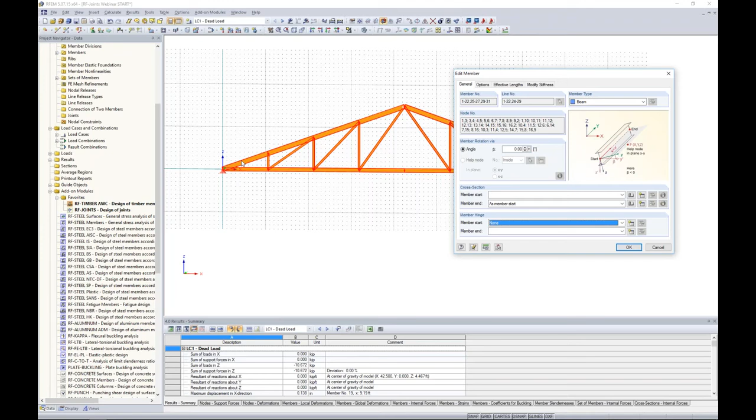Now the other thing I'm going to do is get rid of all of my member hinges. Remember I applied member hinges up at the top here and up at the sides. So now every single member hinge will be set to none, and I click OK. So we did do connection design at the top here and at the left and the right of the truss, but I did not do connection design, simply for the sake of time, for these other members.

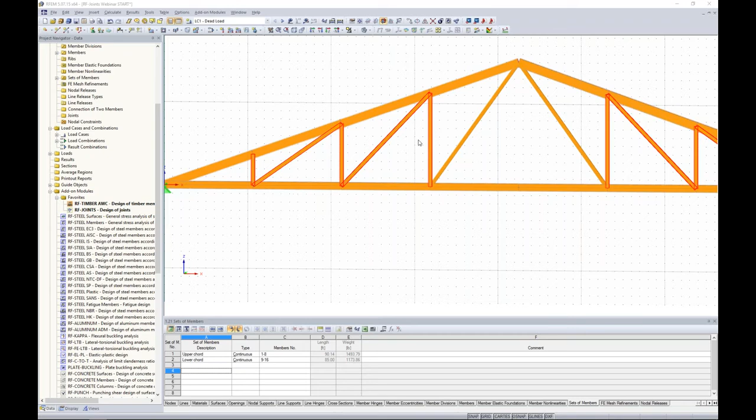So in order to get accurate internal forces, what I do need to do is to hold down my control key and select all of these members that I did not do connection design. I'm going to right click, edit my member again, and for this one I will add back in that moment release at the member ends. This is simply because I don't want moment transfer to my upper and lower chords.

Now for this one I did do a connection design at the top, but at the bottom I didn't. So at the member start I'm going to add back in that moment release, and at the member end for this member I will add back in that moment release. So now the model is set up accordingly, so we can jump back into RF-JOINTS. And under the Details tab, we will generate the member eccentricity with the Generate Connection model.

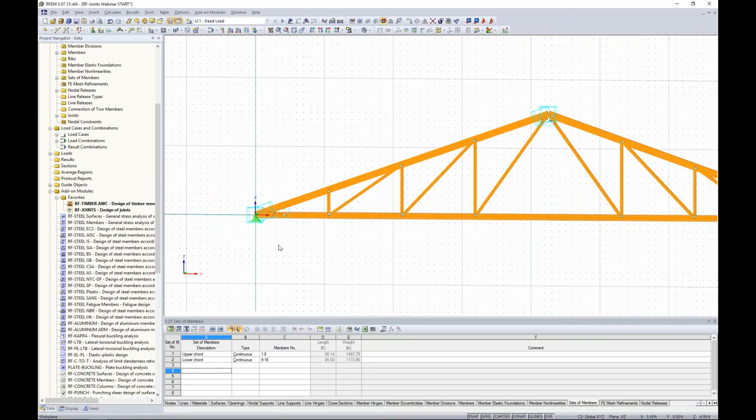So I'm going to click OK, click OK, and now we get these funny little looking boxes where my connection designs are. So what is exactly going on here? Well, I'm going to turn this to wireframe so we can see this a little bit better. Now, the first thing the program's doing, if I double click on this box here, is it's done a complete nodal release. So it has released member 9, my lower member, from this support. And instead, it's connecting member 9 with a little fictitious rigid link to my upper chord.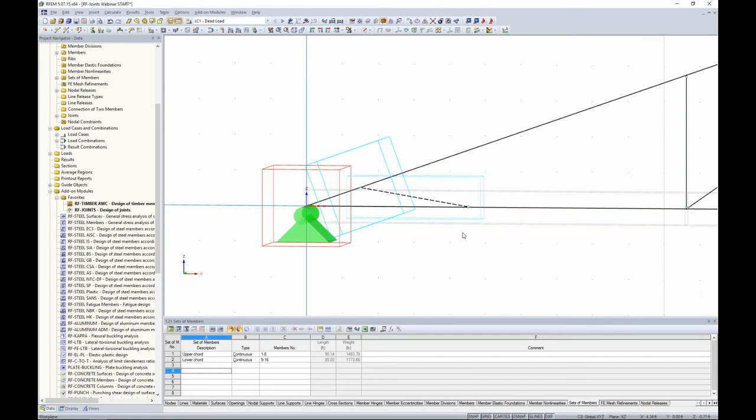Now, the significance of the location of this fictitious rigid link is that this is the center of gravity of my steel plate for my upper chord and the center of gravity for the steel plate at my lower chord. So we're actually taking into account the geometry of that connection. Now, double clicking on one of these other blue boxes, you'll see Edit Joint. So this is what's being exported from RF-JOINTS. Here's a nice picture because it can be a little bit overwhelming.

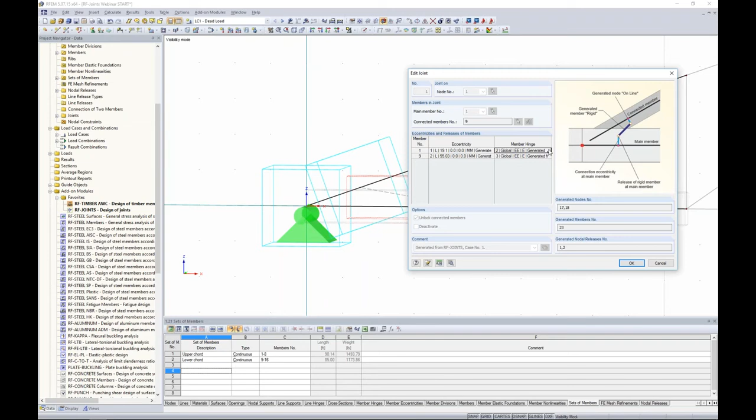We show you the generated member, the rigid member here, and more importantly, the member end releases for this rigid member is a partial fixity. And if I take a look at the details here, the partial fixity is based on the stiffnesses exported from RF-JOINTS. So the different degrees of freedom are actually calculated based on my true connection in RF-JOINTS. So now instead of representing my connection by a single node here with my nodal release, now I really have the true connection in the model based on the accurate stiffnesses.

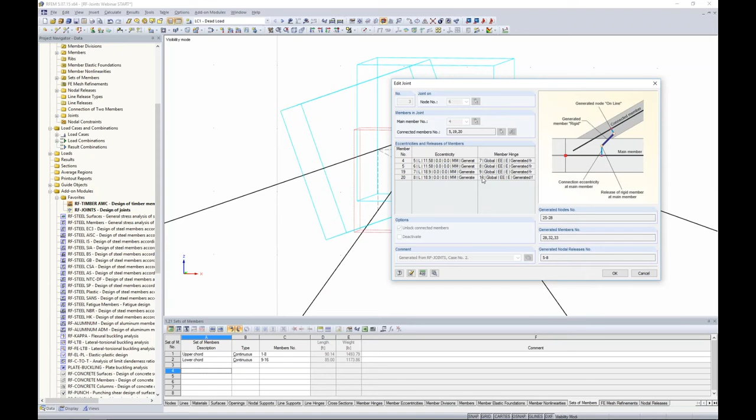So pretty powerful feature, and I can take a look up here at the top. I now have all of these fictitious rigid links here connected at the center of gravity for all 4 of my steel plates. I can double click and take a look at this joint. Again, I have 4 different member end partial fixities here based on the stiffnesses from the connections brought in from RF-JOINTS. So now back in RFEM, if I were to run a simple load combination here, my LRFD load combination.

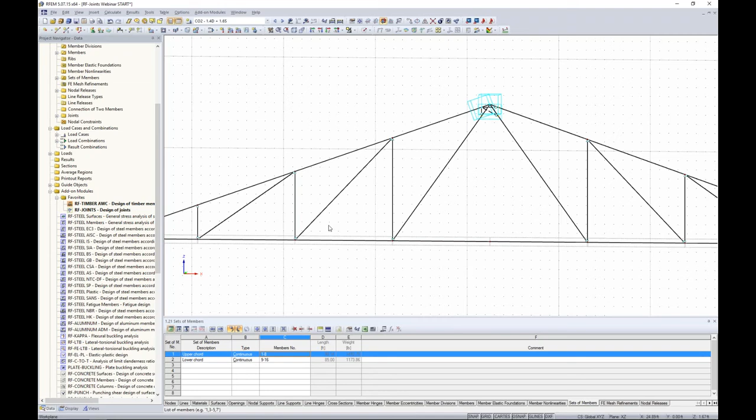Oh, one more thing I forgot to mention. Sets of members. So the set of members was automatically created, which I did mention for our truss generator. But now that we have this nodal release up here at the top, the set of members for my upper chord is irrelevant. The program just gave me an error about that. So what I want to do is to redefine my set of members as 2 separate sets of members now.

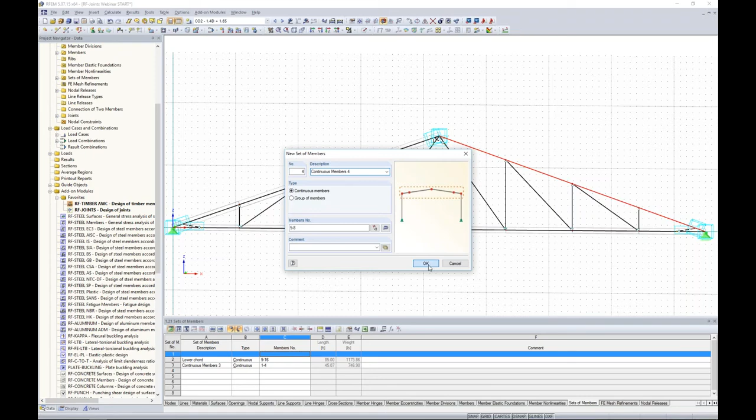So I can right click, create sets of members, 1 continuous member, but I need to create a second set of members here by holding down my control key. So now these can still be designed as 1 continuous member, but because we have this joint release up here at the top from RF-JOINTS, we can't create 1 set of members for this entire top chord.

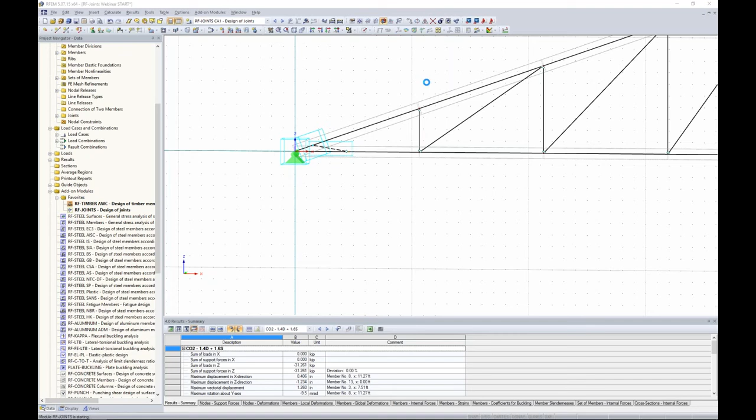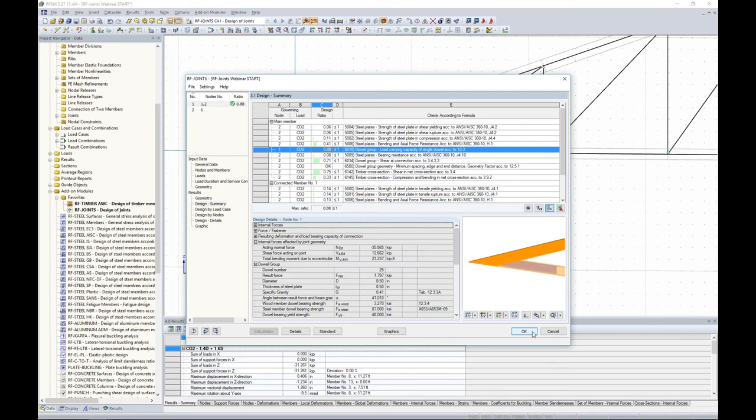Ideally, we want to go back into RF-JOINTS here. We can go to add-on modules, current module, and we'd rerun our calculation for both connections. That's because our internal forces slightly changed now that we're taking into account the true stiffness. It looks like our code check is at 0.88, a little bit higher, but we're still okay in terms of our design. And we'd want to run the design for node number 6 as well. So again, a pretty powerful feature if you want to truly take into account the stiffness and the geometry of that connection back in your model.

Now, the last thing I want to show you before wrapping up the webinar is tapered and glulam members. The reason I'm only spending a couple minutes on this is because it really doesn't vary too much from the design that we've already done. So not much time needs to be spent on it. But I do get asked the question quite often, how does your program handle tapered and curved glulam members?

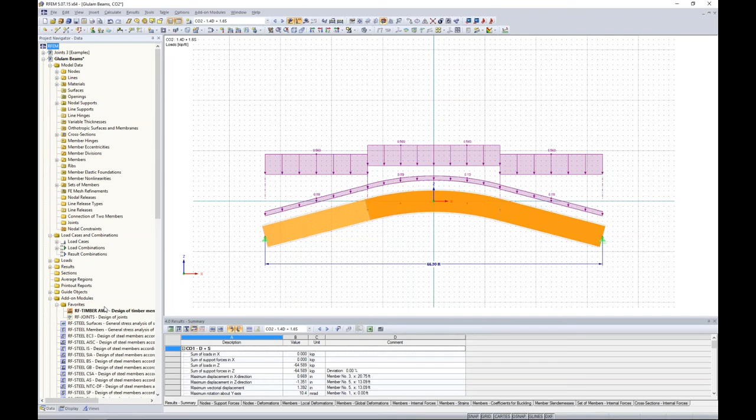Now, jumping into RF-TIMBER AWC, I have already created 2 separate cases. The first is tapered glulam, so I'm only doing design of my, let me scroll out here, of my member number 1 for my first case. And then under the second case, curved glulam, I'm doing design of my set number 1. So you'll also notice I'm running LRFD for my curved member here, but my tapered member, I'm running ASD. So you can even run different design methods within the program if you'd like to.

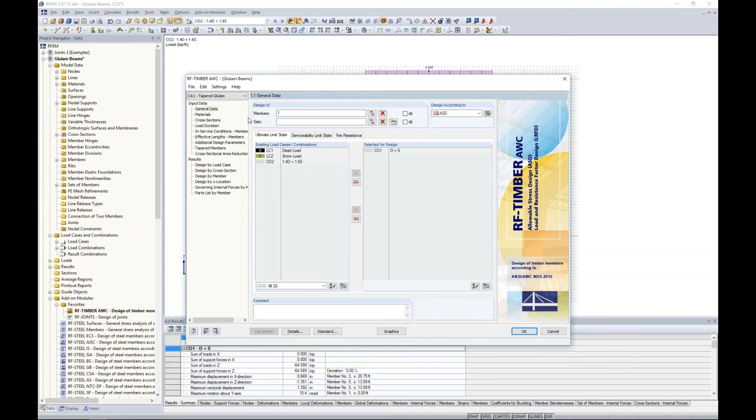So there are 2 different distinctions with the curved and tapered glulams in comparison to the straight, typical members that we did before. The first is under load duration. You'll notice now that we have a loading condition for radial stress design. If we use the drop-down box here, we have two options, other types of loading or wind or earthquake loading. This simply comes from table 5.28 in the code, and for tapered members, it's important because it's needed for stress interaction factors from 5.3.9. So you can specify that type of loading here.

Now, the other thing is that a new table was automatically created because the program recognized that this is a tapered member, called 1.10 Tapered Members. Simply the cross-section at the start, cross-section at the end, the length is automatically brought in as well as the angle of the taper. Now there is one thing that we do need to specify, and that's just the grain parallel to edge.

Now as far as the design, we can jump down to design by member. Really not much is different, of course, other than our code references. If we take a look at some of the code references here, you'll see equations from chapter 5. This is the glulam chapter in reference to tapered and curved glulams as well, and the program just automatically does those checks for us.

Now the other thing to jump to is the curved glulam. Again, two differences. Load duration, and again we have the radial stress design. This is a little bit more significant for curved members for the radial tension stress capacity. Looking at the curved members table that was automatically calculated, this is a little bit different because for curved members we have the minimum radius of curvature for the inside face. And this is the ratio check for the thickness of the laminate over the minimum radius of curvature.

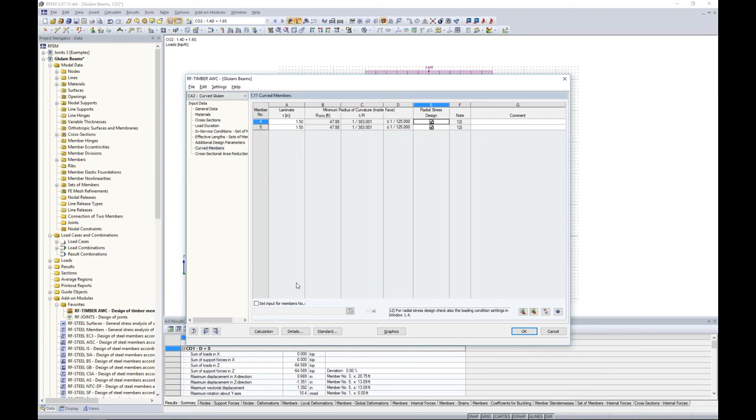Radial stress design is automatically checked as well. You can uncheck this if maybe you have reinforcement at the ends of your curved glulam members so that radial stresses are not of concern for you. Again, running the calculation here quickly, nothing is different in terms of our results tables other than our code references to Chapter 5 for the glulam members.

So with that said, you can see I just quickly flew through that, but the reason why is really not much changes, and the program pretty much automatically detects these types of members and will point you in the right direction for your user input.